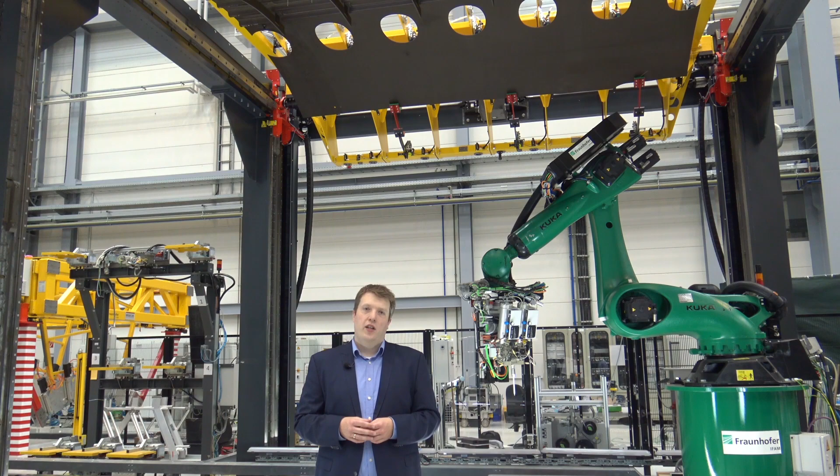My colleagues and I have been working here in the broad field of automation with a focus on the aviation industry for more than 10 years. Since the COVID-19 pandemic is running, our daily business has changed a lot. Instead of our booth at the ILA 2020, we would like to invite you today to a small tour through our research lab and show you 3 outstanding examples of our R&D work of the past years, to give you an idea of how aviation production in the 21st century could look like.

Automation has become an ever-present topic in the aviation industry in the last years. A new aircraft not only has to be climate-friendly and quiet, it should also be possible to manufacture it in larger numbers, at lower costs and in less time. This triangle demands a lot. Not only the OEMs and Tier 1 suppliers have to adapt to these requirements, the entire supplier industry has to go through a change. Perhaps some of you are now asking, why do I need such a research center?

Here we can offer our industrial partners the environment to develop and test new technologies in full scale together before they are implemented in daily production at your customer's site. In the next 25 minutes, my colleagues will give you insights into the latest fascinating topics Fraunhofer IFAM is working on. These film episodes were recorded previously.

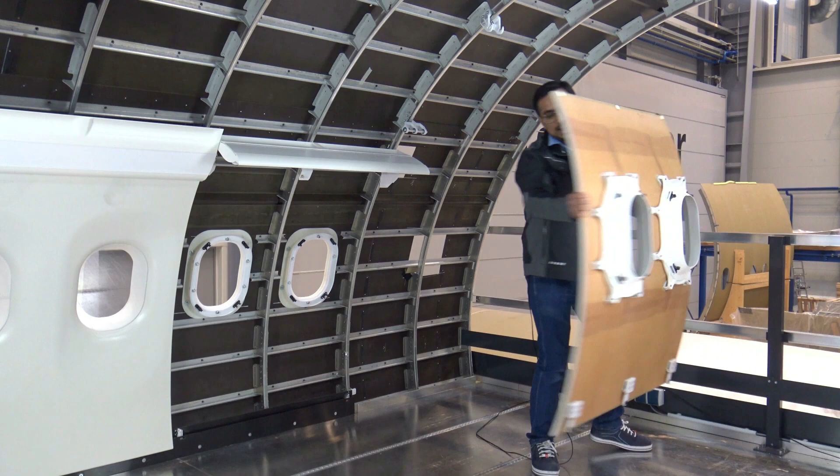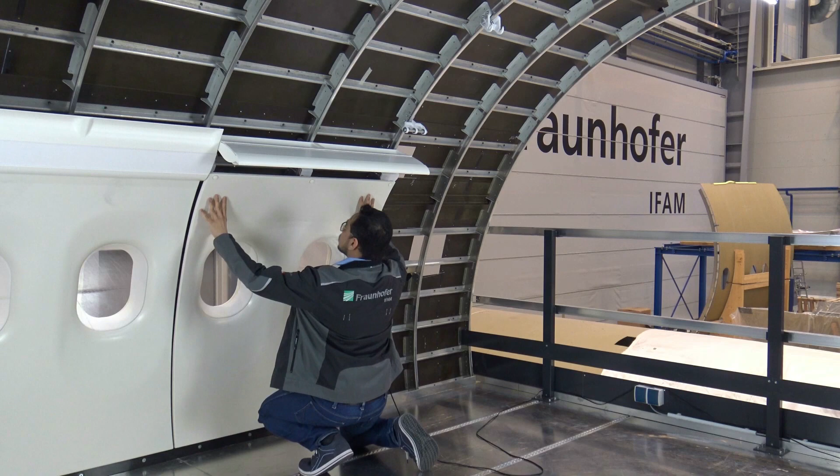So let us have a try here. This is the side panel. The first step is to put them onto the rails. And then just have a slight push. And in this way it's attached, and closing the flap will completely lock it.

The hatrack is more than 2 meters long and weighs about 42 kilograms, but they are still lighter than the current hatracks in the aircraft industry. An empowering arm is used for automated and semi-automated assemblies of hatracks. At first, these tie rods are brought into these hooks, and then the part is rotated so as to get a completely locked assembly with the fuselage. In order to guide the worker with proper assembly instructions, a HoloLens is used. In the project, a total of 4 side panels and 2 hatracks were installed. Now that we have had a look into the cabin area, let us go through the cargo area.

So this is the cargo area, and the distance between the floor and the ceiling is hardly 1 meter. The space here is also very confined and not favorable for walking continuously for hours. The ergonomics analysis of different processes involving workers inside the fuselage did not portray a positive picture, especially here in the cargo area. Hence, just like the side panels in the cabin, the panels in the cargo area were also installed automatically with the help of robots. To summarize the achievements of the entire project, let us go through the short video.

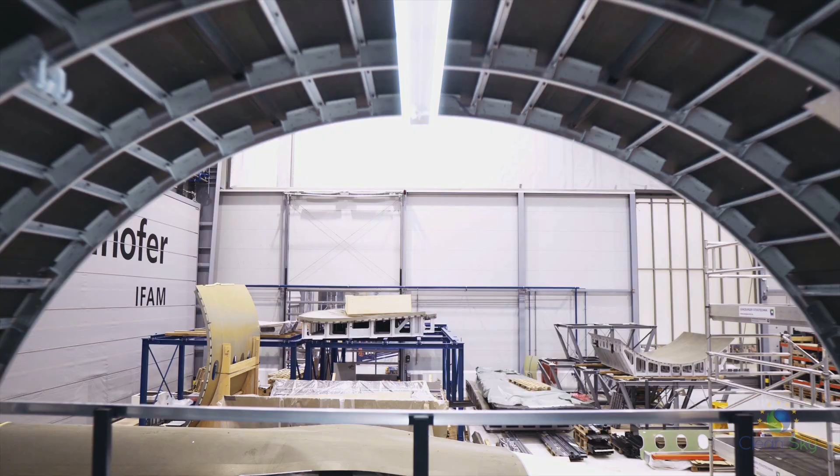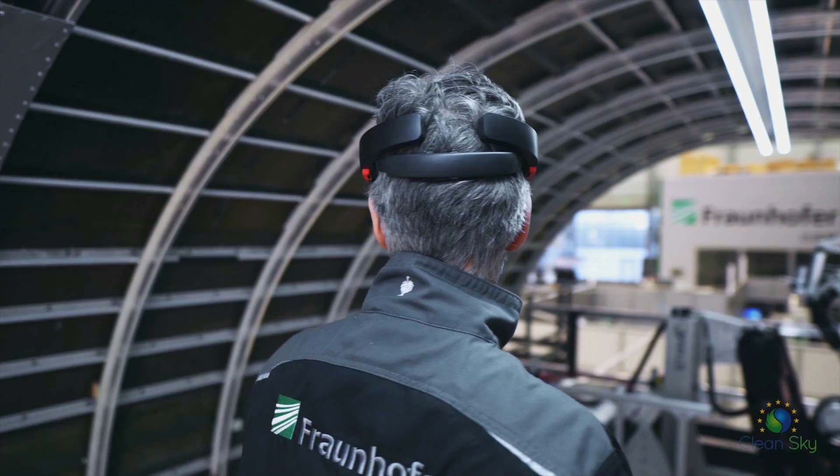In the Clean Sky 2 ACCLAIM project, new installation techniques were developed and validated to optimize the lining installation processes for airplanes. The focus of the project lies on an automated assembly, human-robot collaboration, as well as newly designed aircraft parts and a mock-up fuselage section which are ready for automation.

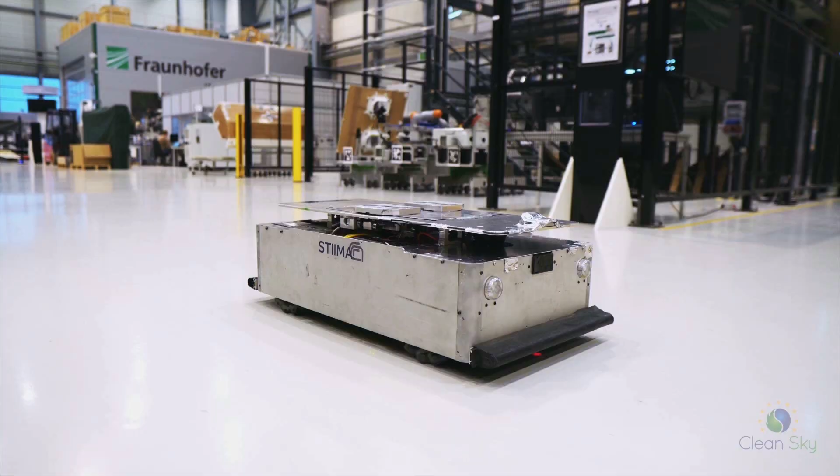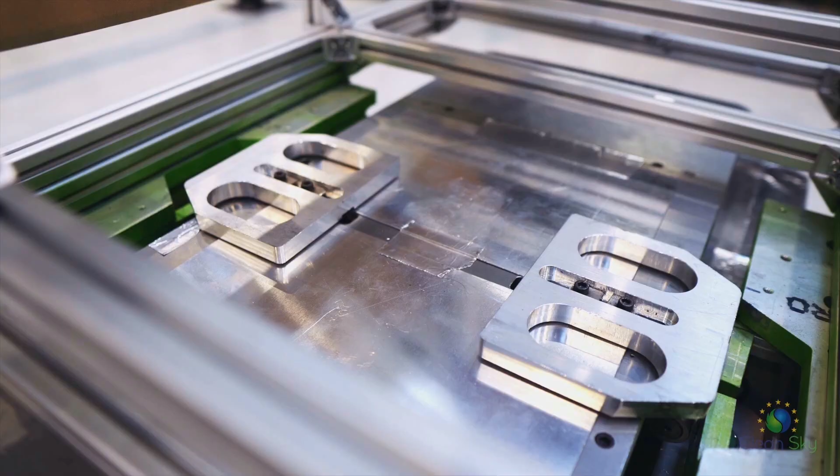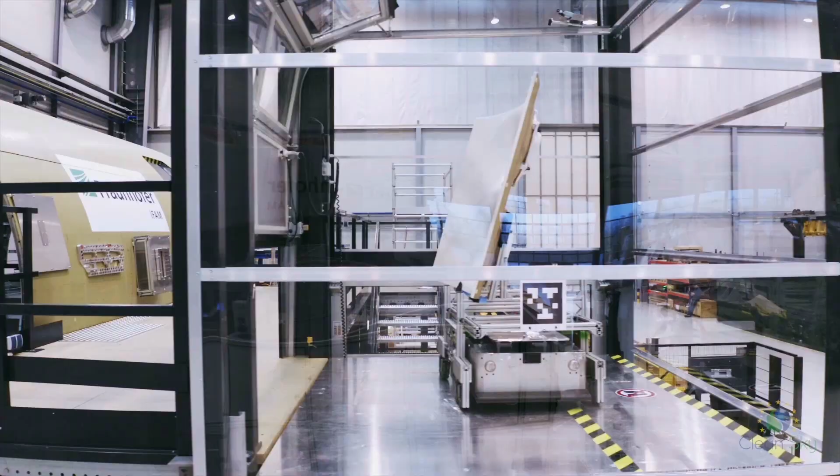An automated guided vehicle, short AGV, identifies the carrier type through a QR code. After aligning, it automatically docks itself to the carrier. AGV and lift communicate with each other and exchange location and floor data in order to take the load to the desired lining area. The AGV and the part carriers are designed to meet requirements of limited access and load capacity inside the aircraft.

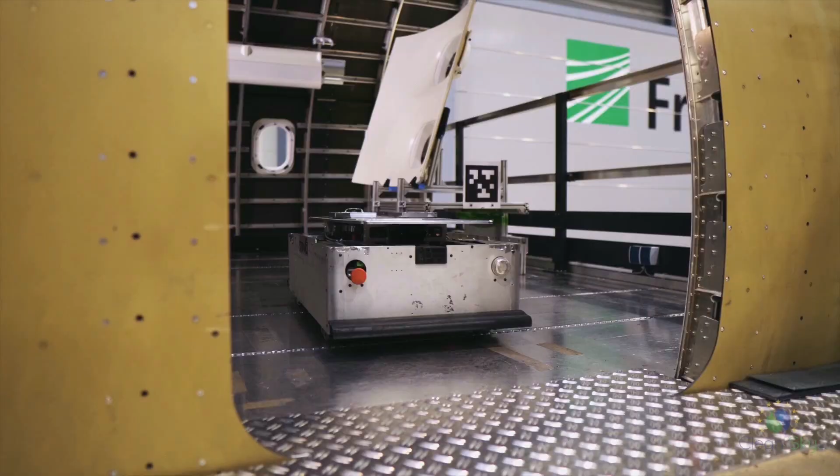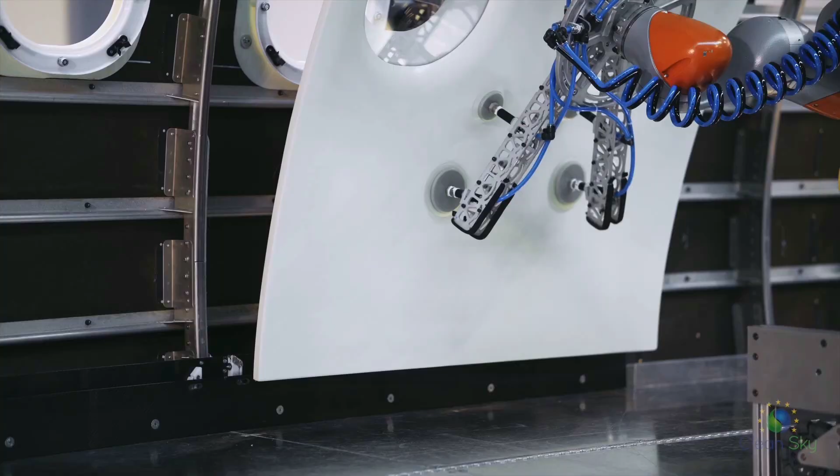An integrated vision system scans the side panel and identifies the best position for gripping and assembly. The panel itself is held by self-locking fixtures on the fuselage structure. A digital twin with a dashboard software enables monitoring of the whole process from a remote workstation.

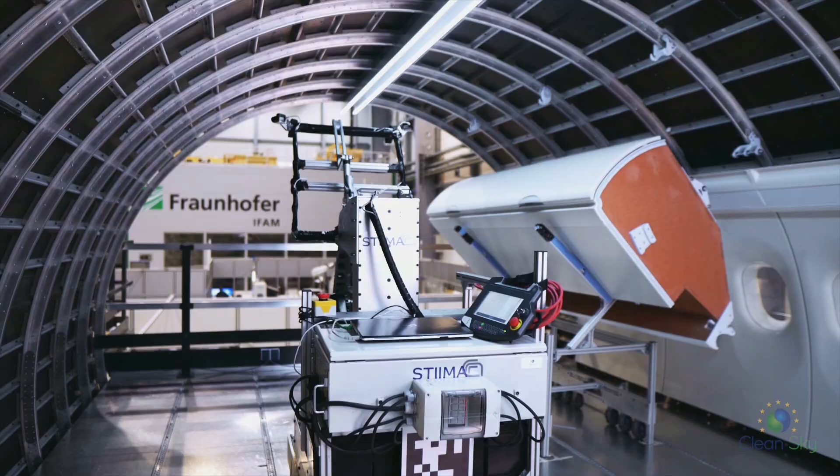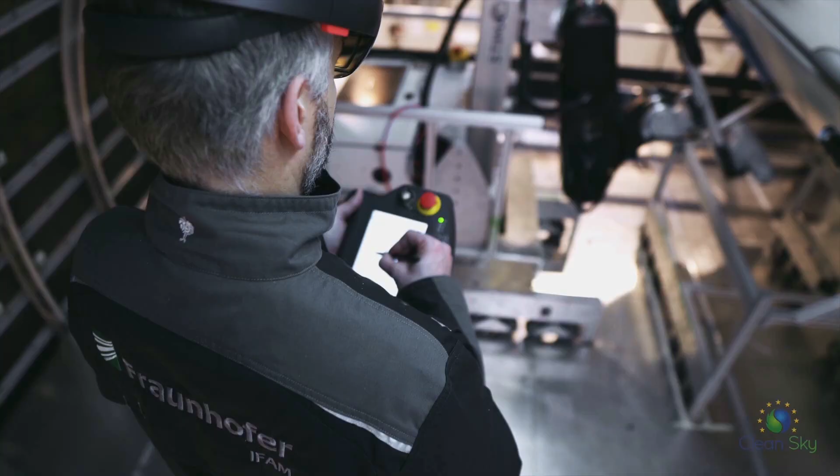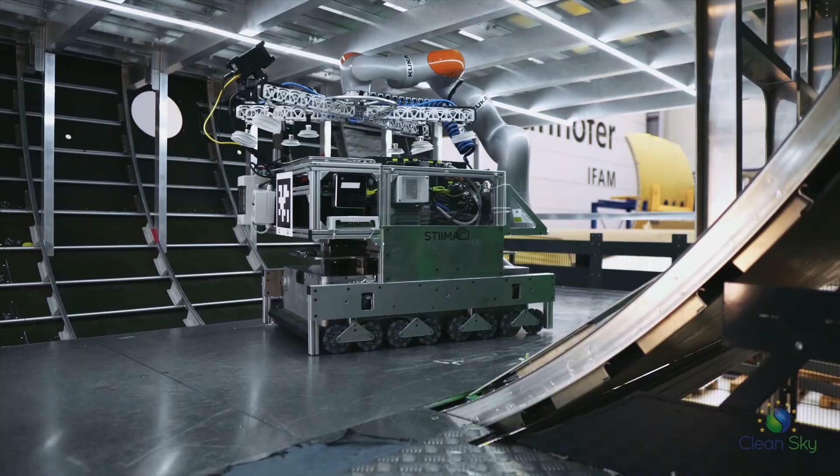For the assembly of the hat rack, the robot assists the worker by lifting and installing the heavy load. The instructions for the correct assembly are provided to the worker by a HoloLens using augmented reality. The robots are designed to operate even in the cargo section of the aircraft. This can avoid the ergonomically unfavorable postures of the workers in the confined area.

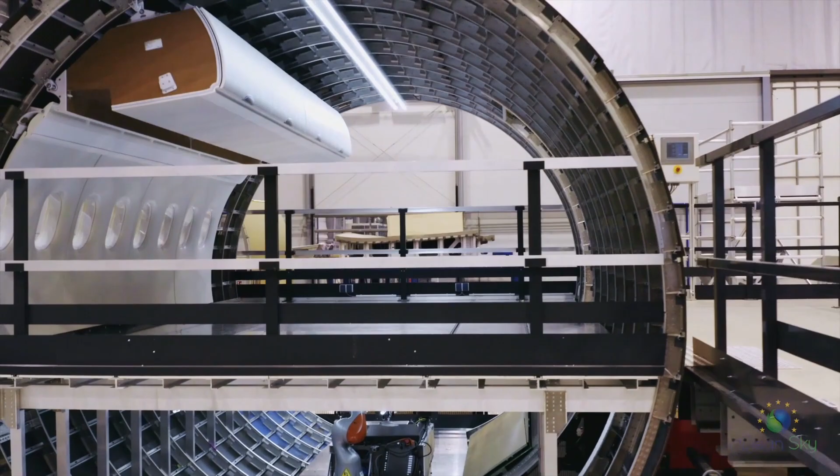The vision system identifies the gripping position, and the trajectory is planned to avoid all possible collisions in the confined cargo space. The validation of the processes yielded positive results in terms of productivity, ergonomics, and costs. The developed solution is a potential alternative to conventional assembly methods for future aircraft cabin and cargo installation.

The entire work of the research project was divided into different work packages. The project Calito was undertaken to design and develop smart, lightweight components for an easy assembly. The automated logistics and installation of components was a part of Eureka project. Ergonomy analysis, digital twin, and augmented reality were a part of Sinfal research project. The mock-up fuselage was built by Fraunhofer for validation of these projects.

The project Vista, which is still ongoing, is related to automated quality testing of aircraft interiors. The installed components will be inspected for defects such as gaps, steps, misalignment, scratches based on color and textures. This will result in a better quality assurance and will ease the process of generating quality reports online. Vista is scheduled to be completed in January 2021. Upon validation, this will be finally integrated into the results of the project ACCLAIM.

The results of these projects are very important for future aircraft industry. Automation of cabin and cargo installation is a major topic for aircraft manufacturers like Airbus, who want to reduce process time and effort. There are still some challenges related to these topics. The developments from ACCLAIM project have to be transferred from research level to industry level, where process stability and robustness must be guaranteed. That's so far from ACCLAIM project.

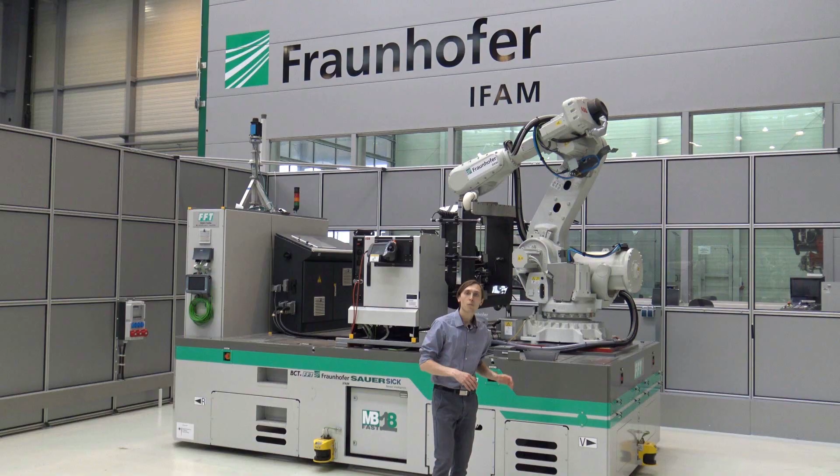If you can have a look at the area behind me, you can see some mobile robots which are used for machining of large aerospace parts. My colleague Christoph Brillinger will guide you through some of the applications. I want to show you today our mobile machining system that we have created in the project MB-Fast 18.

Conventional machines are usually built as a gantry machine. And as you can imagine, if you want to machine a really large component, you need a really large gantry to cover this up. So this is a really big drawback of those. And also they need cost-intensive, high payload foundations and have a high ratio of non-productive time, since a lot of alignment processes and measurement processes are performed. So in this time they're standing still.

Our mobile machining center is composed of a mobile platform, industrial robot and a portable CNC machine. The concept behind it is to attach the CNC machine onto the component, and so stepwise fulfilling the machining job, section by section. The big benefit of this concept is that you are able to use several mobile machining systems in parallel. So if you have a medium-sized component, for instance, you use 1 or 2 machining systems. Or if you have a really large system, you scale up and have 3 or 4 systems.

So you're really flexible and can use your machines on demand, and you get rid of those non-productive times when you align your component and you're waiting with your machine. So this is a major benefit of being more efficient. We also mobilized a laser tracker for obtaining a higher utilization rate of this measurement system. In the following, I want to show you a short video of the system so you can see it's moving and get a better impression of its functionalities and how it's working.

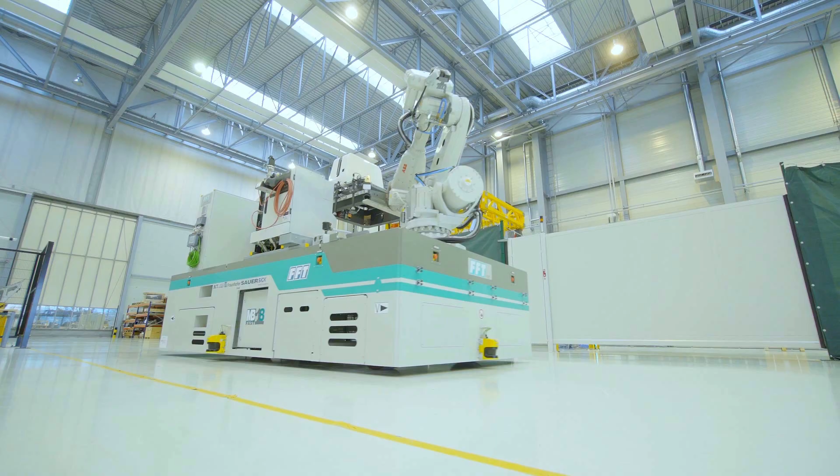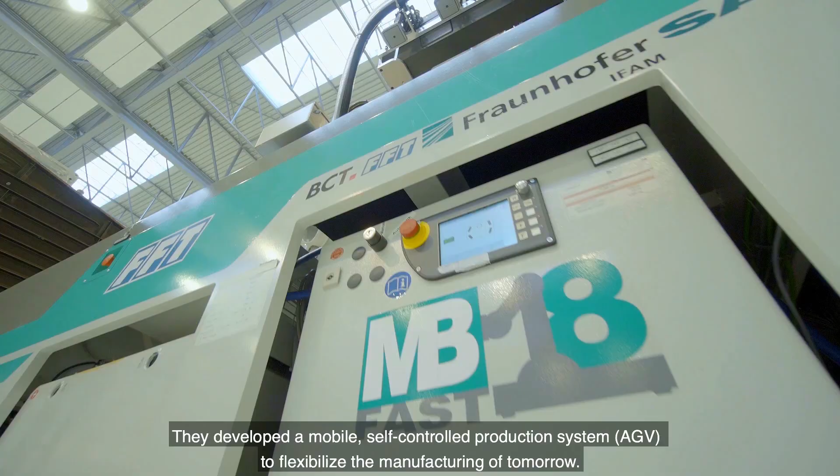Within the R&D project MB-Fast 18, multiple innovative companies joined together to actively shape the production of the future. They developed a mobile, self-controlled production system, AGV, to flexibilize the manufacturing of tomorrow. While today's machining centers are tied down to one location, our system has been mobilized. This allows us to adapt to new approaches.

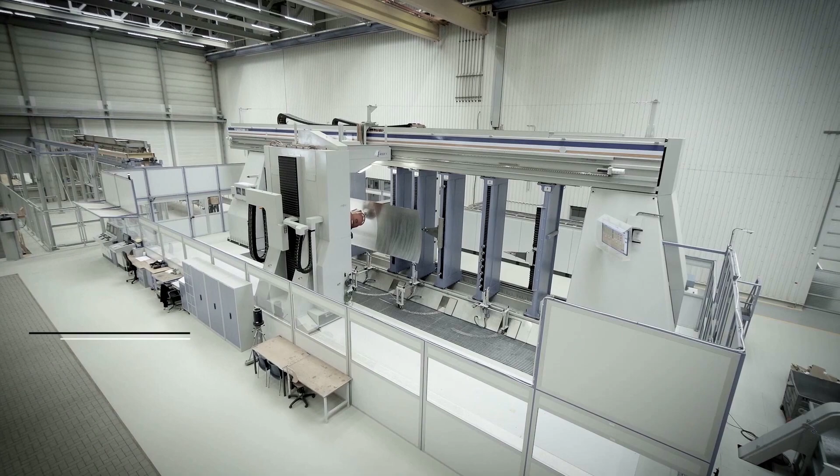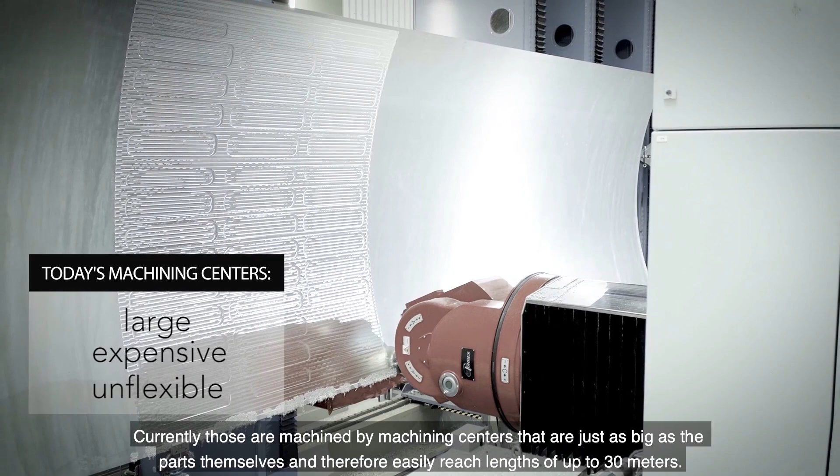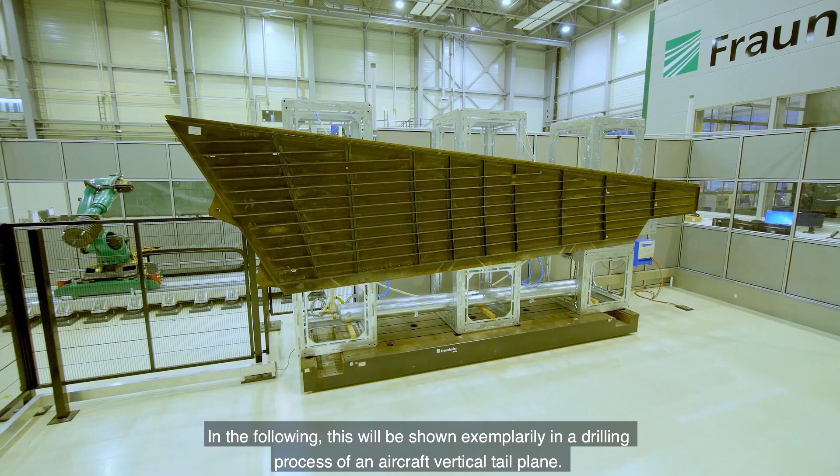This project deals with the fabrication of large structures like they're used in the aircraft industry. Currently, those are machined by machining centers that are just as big as the parts themselves and therefore easily reach lengths of up to 30 meters. These machines shall be superseded to reduce costs and space requirements. By reducing the size of the machine tool itself, it's possible to mobilize it and to drive to the operating site directly. In the following, this will be shown exemplarily in a drilling process of an aircraft vertical tailplane.

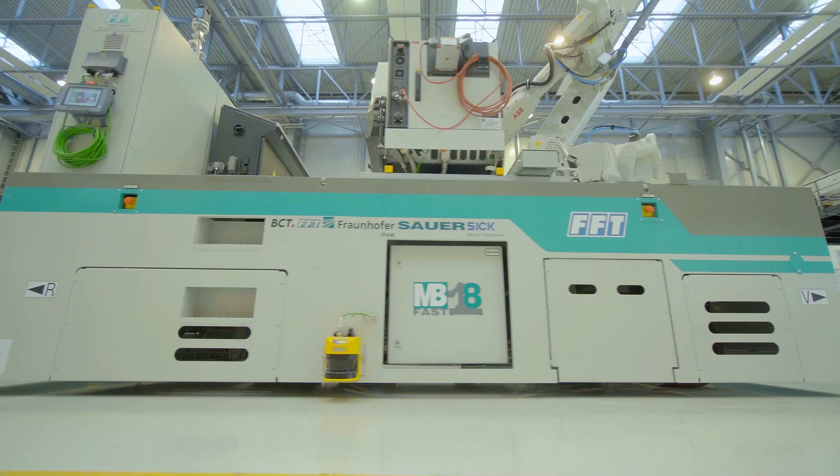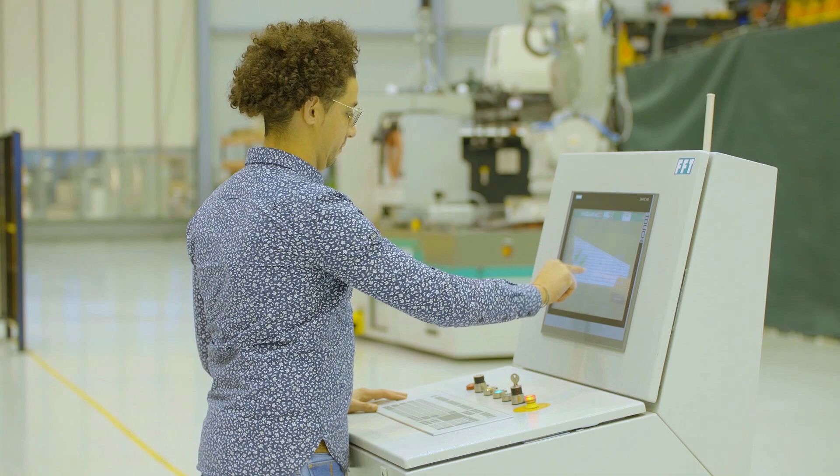FFT Produktionssysteme has developed and built up the AGV. We also integrated all developed technologies into one central control. Because of the omnidirectional drives, the autonomous and wireless system is able to move and navigate completely free inside the production facility. The start of the process is controlled through a high-level manufacturing execution system, MES, or manually from an operating console.

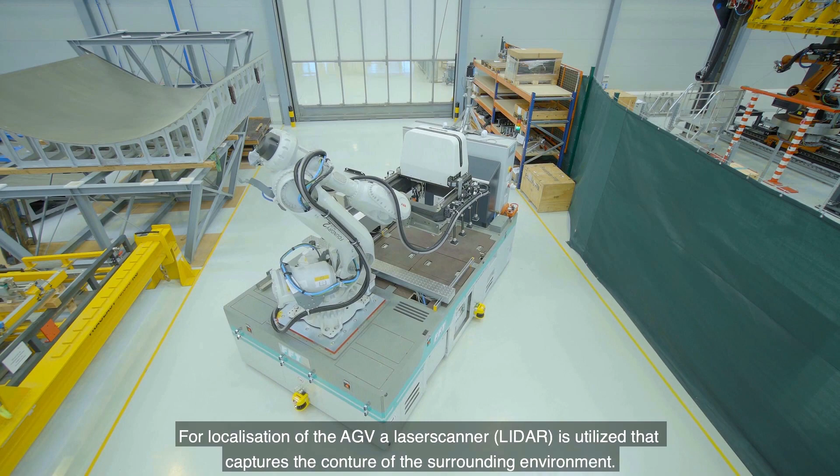For localization of the AGV, a laser scanner is utilized that captures the contour of the surrounding environment. To calculate the AGV position, we align the LiDAR data with a digital map of the area. The whole navigation is completely autonomous. We enable this by an algorithm that provides the optimal path to any destination within the workspace.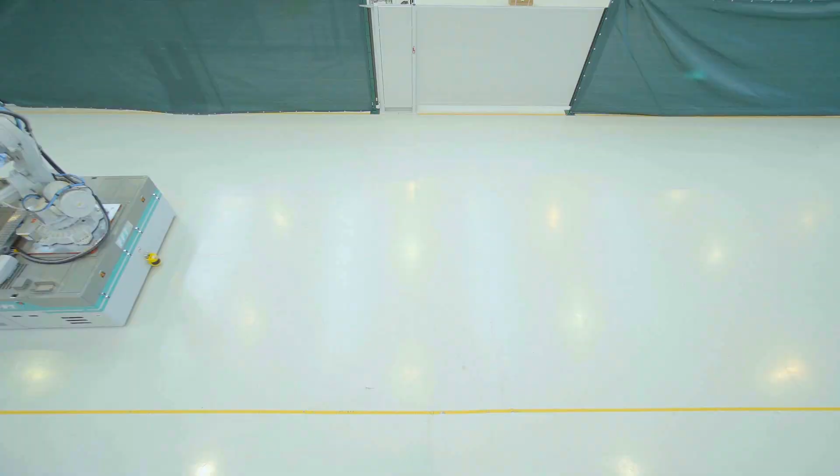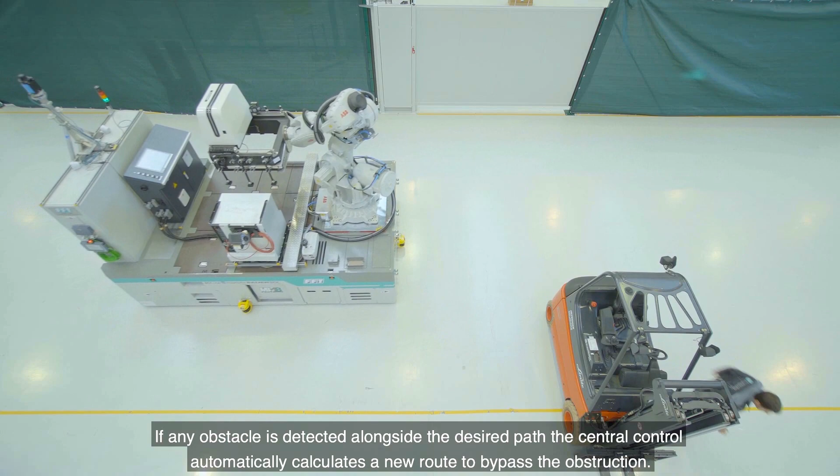All sides of the AGV are equipped with additional safety scanners to identify people and obstacles. If any obstacle is detected alongside the desired path, the central control automatically calculates a new route to bypass the obstruction. If any person is entering the safety area around the AGV nevertheless, the safety scanners from SICK ensure a safe stop of the vehicle.

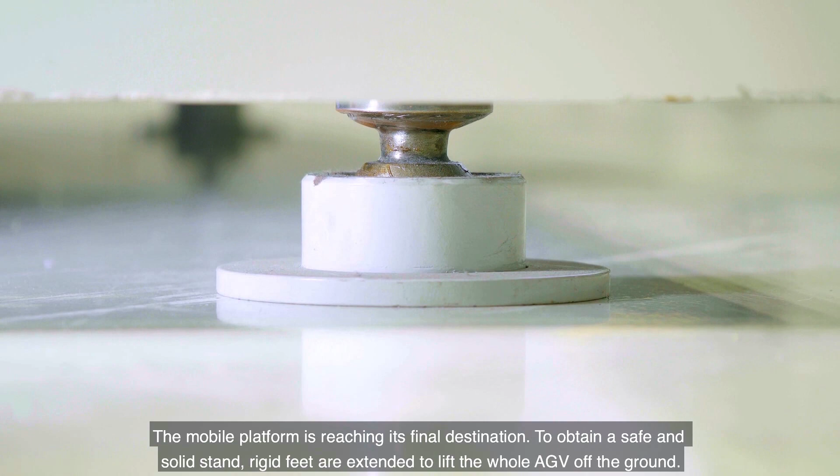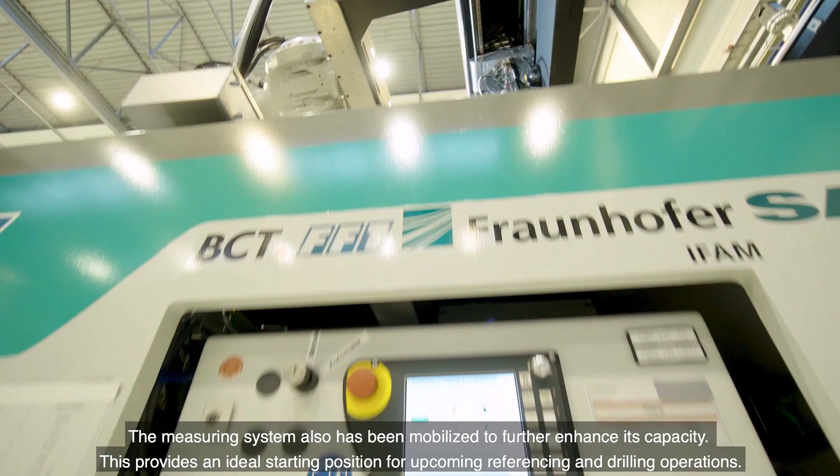The mobile platform is reaching its final destination. To obtain a safe and solid stand, rigid feet are extended to lift the whole AGV off the ground. The measuring system also has been mobilized to further enhance its capacity. This provides an ideal starting position for upcoming referencing and drilling operations. The milling drilling unit, named Mobile Block, is now set up in a pre-position.

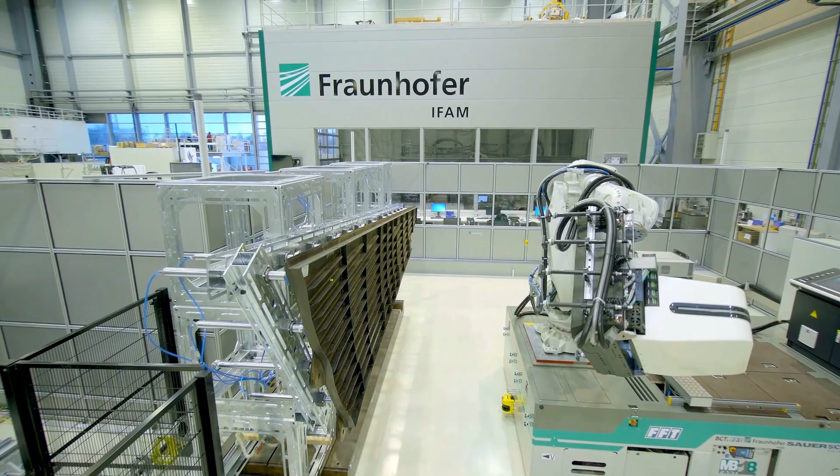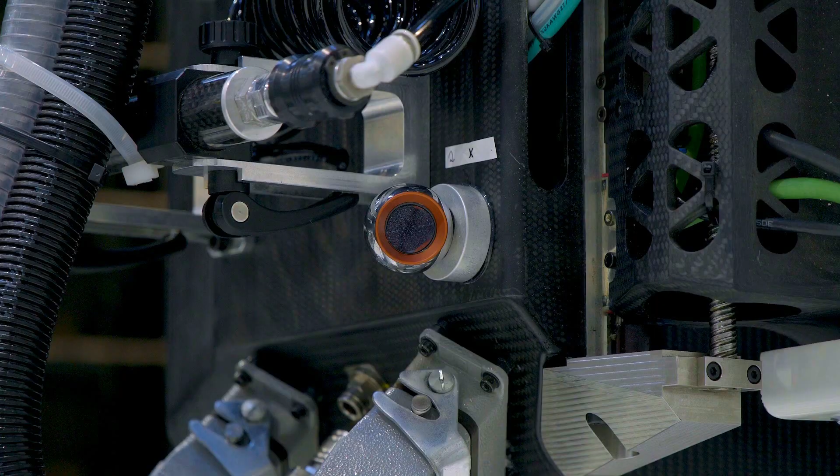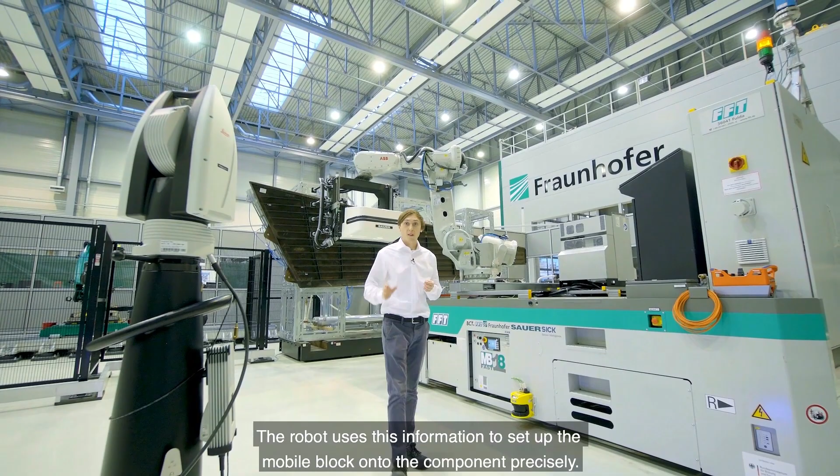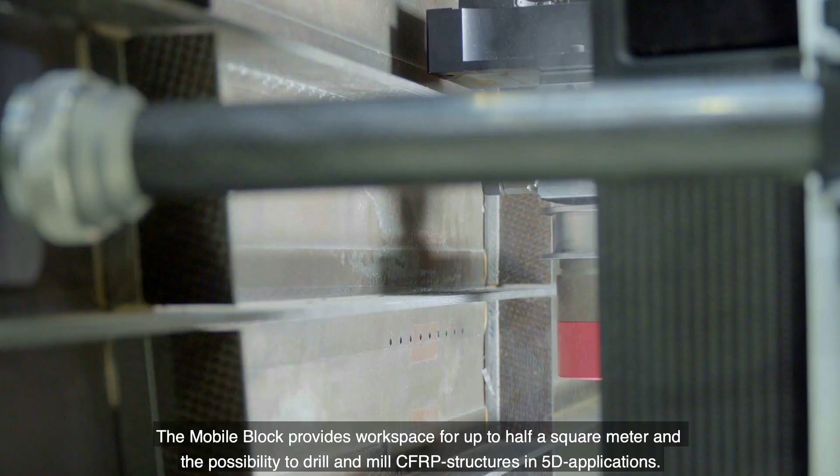For determining the position of the robot precisely and meeting highest manufacturing tolerances, a laser tracker is utilized. The robot uses this information to set up the Mobile Block onto the component precisely. The Mobile Block provides workspace for up to half a square meter and the possibility to drill and mill CFRP structures in 5D applications. To determine the exact drilling hole positions, local scanning of the surface is performed.

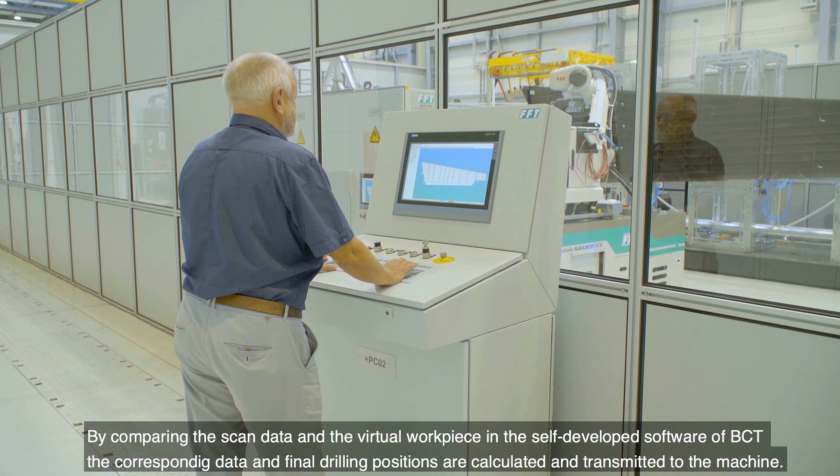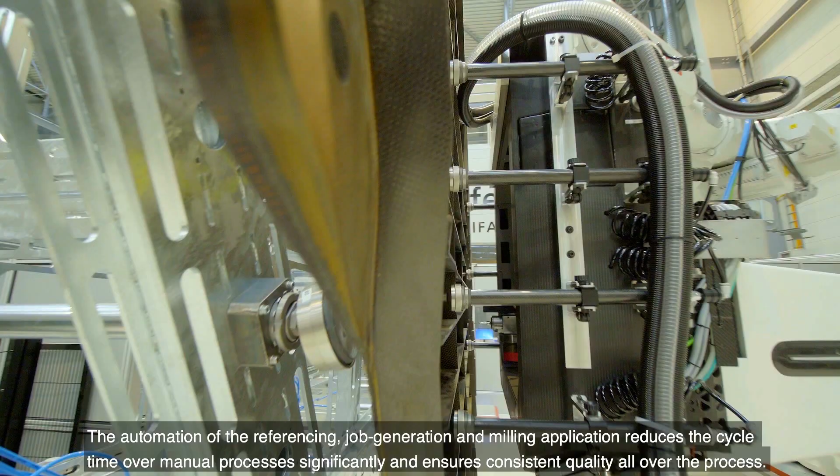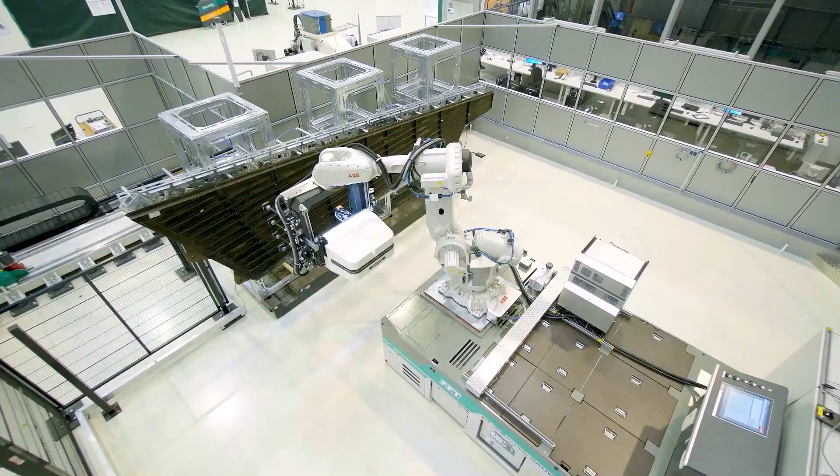By comparing the scan data and the virtual workpiece in the self-developed software of BCT, the corresponding data and final drilling positions are calculated and transmitted to the machine. The automation of the referencing, job generation and milling application reduces the cycle time over manual processes significantly and ensures consistent quality all over the process. By relocating the Mobile Block on the part, a flexible extension of the workspace is obtained. At this point, the whole referencing and drilling process starts again.

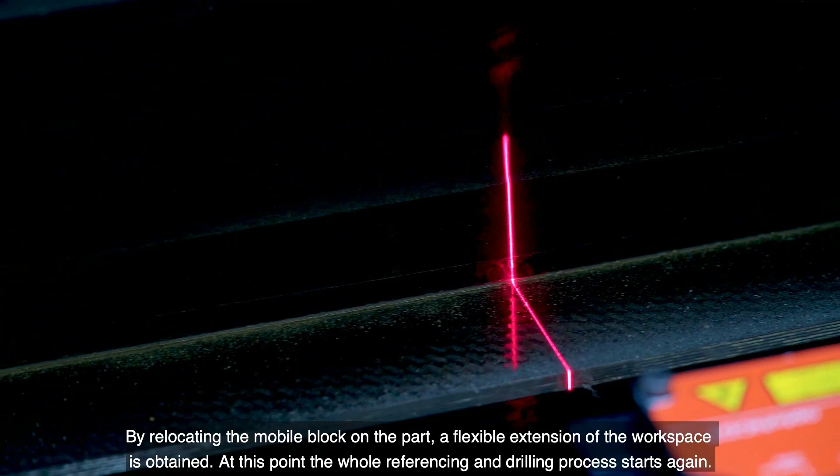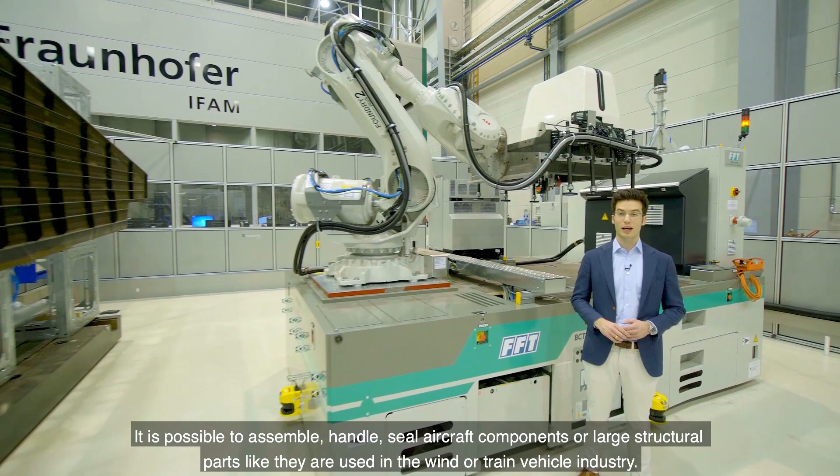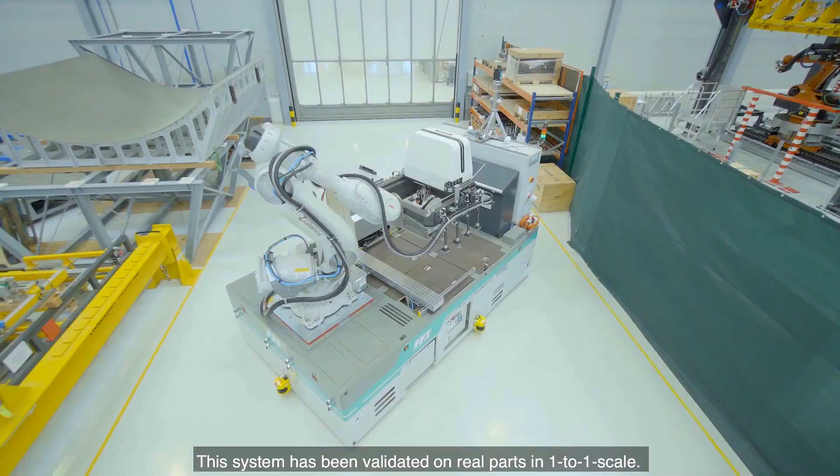Within this public-funded R&D project, the production system has shown potential for further applications. It is possible to assemble, handle, seal aircraft components or large structural parts like they are used in the wind or train vehicle industry. This system has been validated on real parts in 1:1 scale. This demonstrator and the innovative research group allows the active participation and development of the factory of the future.

As you have seen, there was a strong group of partners behind MB-Fast 18 that has worked closely together with us for achieving this goal of a mobile machining system. In governmental funded projects like MB-Fast 18 was, we are forming groups of partners from the industry as well as from the universities that work with us on those topics.

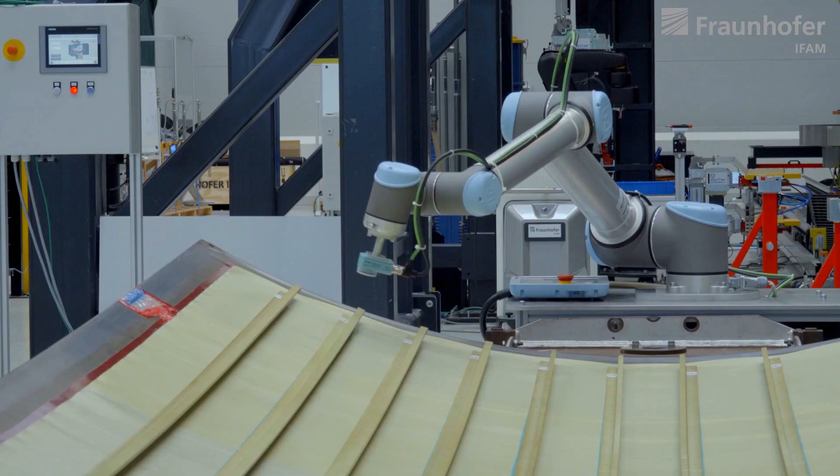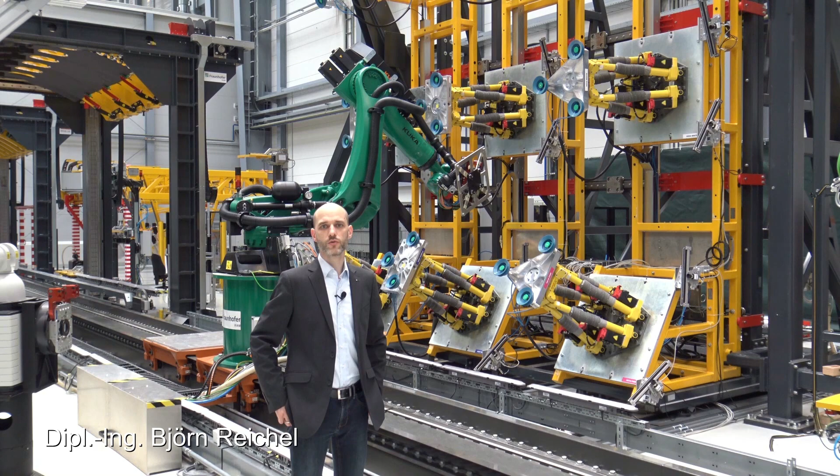In addition to new manufacturing methods and processes, digital transformation is an important element for modern production. For a few years, the share of digital tool development, such as digital twins, virtual commissioning and the like, has been increasing permanently within our projects.

The AutoGlare project, presented before, focused on a highly automated production of fuselage shell elements. The challenge of applying adhesive film in accordance with tolerances and stringer integration into a double curved skin was achieved not least by the virtual process simulation and derivation of path planning for collaborating robots.

All the aforementioned projects are representative of a whole range of different projects in the field of automated assembly. The knowledge and results from successfully completed projects are transferred into new technological approaches and form a solid base for further works. Many thanks to my colleagues for the insight into the completed projects.

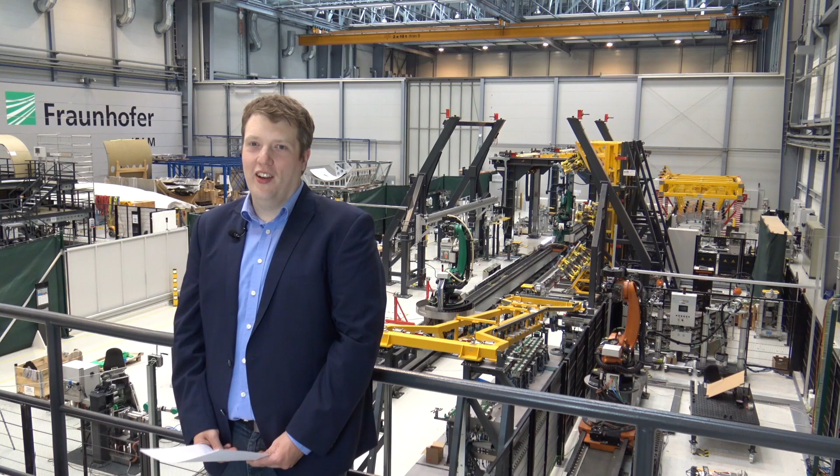Now we have seen what kind of cooperation between robots can be performed, and which possibilities mobile units can offer for the use of robots in an industrial setting. Not only large robots for machining and assembly tasks offer new opportunities here. Even small robots can scale up the range of possible applications in the aviation industry. Combined with technology bricks of digitalization and a wide experience in process development and implementation, we can offer here an ideal environment for your R&D task for a production of tomorrow. Let's go to my colleagues now for a question and answer session.

We are now live at the Fraunhofer IFAM in Stade for the roundtable discussion. I would like to introduce my dear colleagues to you again. From the left, Padra Wall, Christoph Brillinger and Björn Reichel. While they presented their project results, you have used the opportunity to ask a lot of questions to them. And we will start with the first round.

So, one question for you was: the Clean Sky 2 project is a huge European project and ACCLAIM is just a part of it. After this project is finished, what are the next steps for all the technology parts on their way to production?